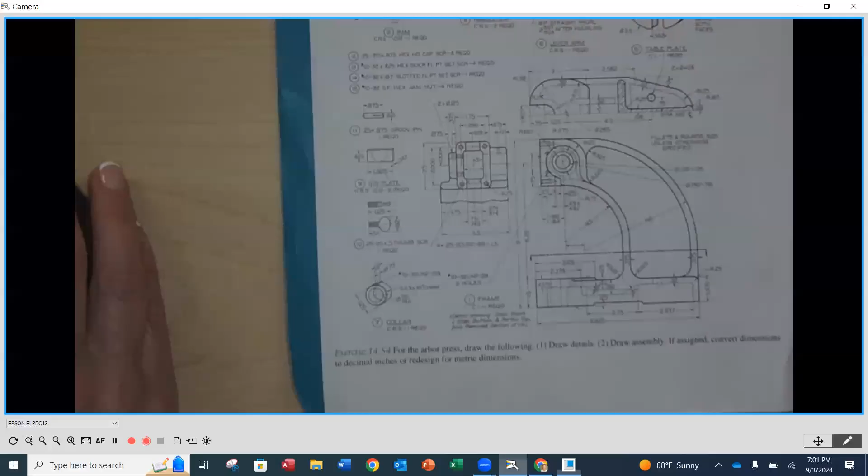Okay. And for this, we're going to just use the default template because this is just for a part. This isn't for a drawing. So we're going to say okay, oops, of course it is. I need to do an _1 because I already created mine. Don't do the _1 for yours, just do 330. And now we're going to be at our familiar spot. So let's take a look underneath our camera at this pinion shaft.

So we are going to be creating the tooth profile of the shaft, and you can't really see a whole lot of detail here. So something you're going to notice is that this is called out as a 20-degree stub 12-pitch gear. And down here, it's going to mate with a ram that is also a 20-degree 12-pitch stub gear rack. Okay, so this is a rack and this is our pinion.

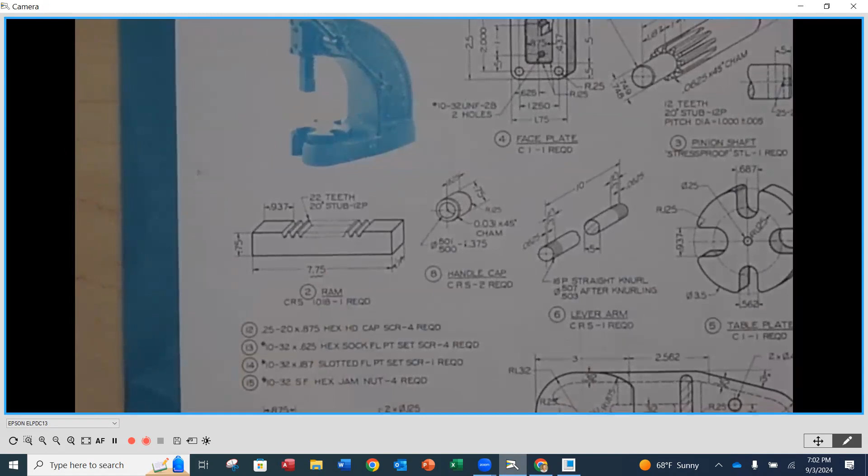Now, as I was doing some investigation, stub gears are quite old school stuff. Okay. And when I was looking at these, they actually don't have a curvature to them. So stub gears typically are going to be a very up and down, just a triangle looking gear tooth, where a spur gear tooth is going to actually have some rounded curves to the sides of it.

Now, in doing some investigation, I was having a hard time finding the equation for the teeth for a stub gear, but in finding out, and I checked this in a couple different places, standard spur gear teeth mesh with stub gear teeth on a rack. So what we're going to do is we're going to actually use what we call the involute tooth profile for a standard spur gear for the teeth on our pinion shaft.

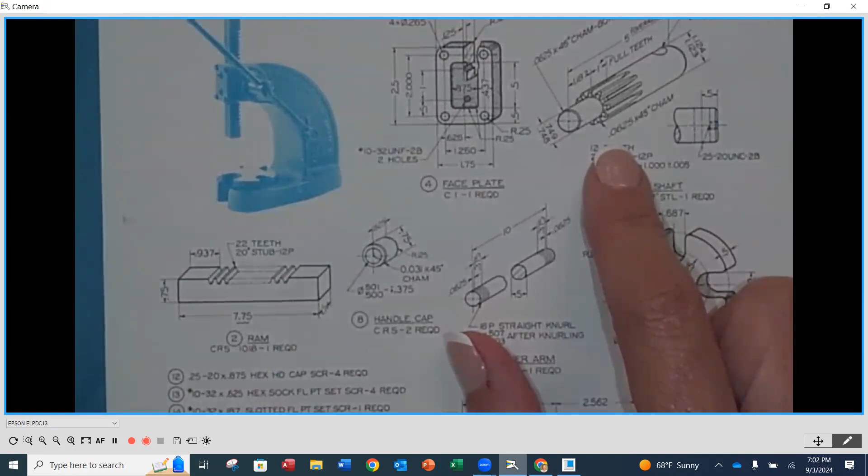But we're going to use, as it's directed here on the rack, the stub teeth. Okay. So these two in combination, even though we're deviating a little bit here on the profile of the gear tooth, they are still going to mesh properly. Okay. So we don't have to worry about that. So we are going to take the approach of spur gear profile as opposed to the stub tooth profile of these gears.

Now, as we look here, you're going to notice that the gears don't extend the whole length of that shaft. What they do is there's going to be a section here where it goes straight for an inch. That's where it says 1 inch of full teeth. And then they're going to kind of sweep out of the actual shaft itself.

Okay, so that's what we're going to be creating in Creo. We are going to actually be creating the cuts out. We're not going to create the individual teeth. We're going to create the portions that we're going to cut away so that the teeth are left over after that operation, or after we create those teeth.

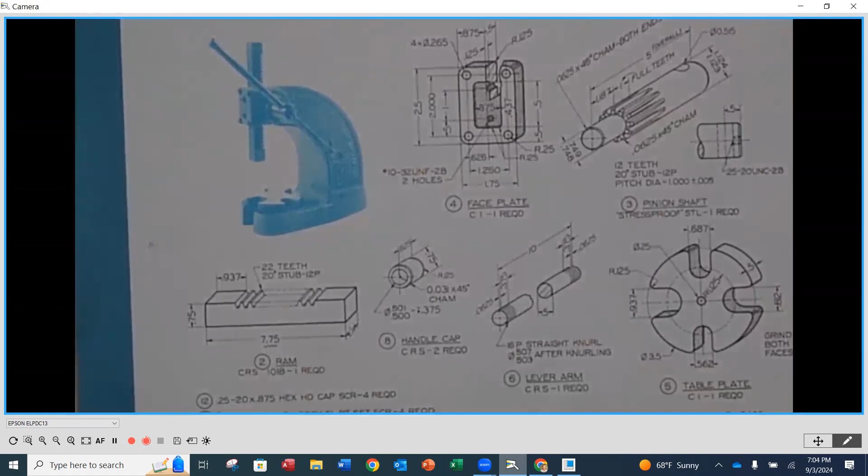Okay, so the process is going to be, we're going to create a sketch of the profile of the cut, and then we're going to do the trajectory of the path that that cut is going to take. This is a sweep. Okay, a simple sweep is going to be one single sketch cross section that we're going to run along a path.

An extrude function is actually a sweep. Okay, except it's in a straight line function. The trajectory is on a straight line. So we don't call it a sweep, we just call it an extrude. But it is a form of a sweep.

But in the case of the sweep that we're going to be doing, instead of putting it just along a straight line, because we could extrude that in, but because it's kind of like going up and out of the shaft after that 1 inch, now it becomes a sweep because now we have to push it along that radius that's created. We're not given information about that radius, so we're going to improvise here.

This happens in design. This happens in engineering at times. Sometimes there might be a missing dimension. Sometimes it's kind of like, okay, as the designer, I got to kind of fill in the blanks here. There's going to be a couple places along the way for this arbor press where that is going to occur. That's kind of the fun part of it. You're going to be able to be a decision maker at some points. Okay. So anyway, that's going to be the approach that we take.

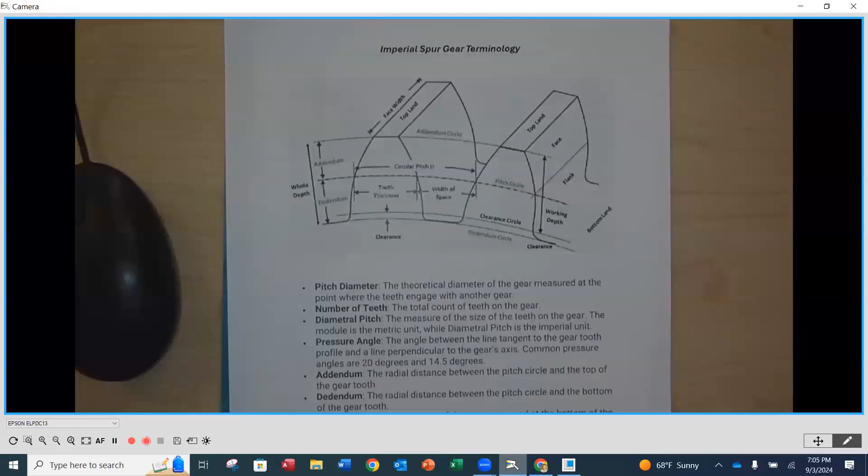Now, what I have gathered for you guys is in the handouts, and there are 2 of them. The first one is that we're going to be referring back and forth to our imperial spur gear terminology. So this is going to equate to the elements that we're going to be creating for the tooth profile in Creo. The other handout that we have is the pinion shaft procedure.

So I'm not going to say it's a perfect step-by-step, but I've kind of hit the highlights that you have to move along. And I'm going to be demonstrating this today in our lecture so that you have the information you need to get this gear teeth cut into that shaft.

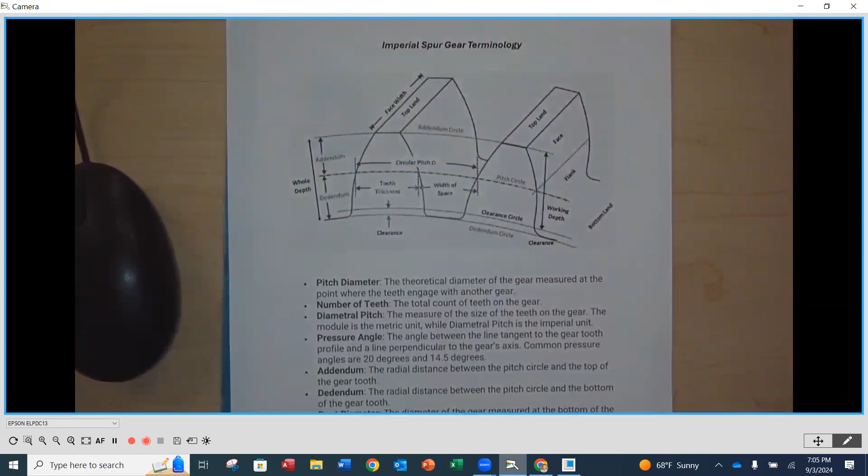Okay. So because we're going to be dealing with the spur gear profile, the profile of the tooth looks like this. So this is where we have this curvature on the sides of the tooth. We have our pitch diameter going through, not exactly the middle of the tooth. We've got what we call the addendum, which is the top portion there, and we have the dedendum. The dedendum is always going to be deeper than the addendum of the tooth.

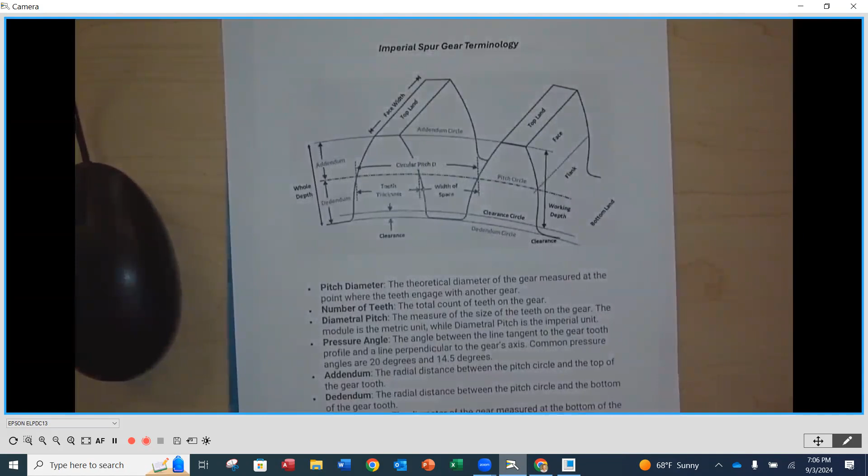And the reason for that is because this pitch diameter is where it meshes with the other tooth, or in our case, the rack. And that's what we call the effective diameter. This addendum of the mating tooth is going to be down in the dedendum of this tooth. So the dedendum always has to be deeper than the addendum. Otherwise, you would have gears that are going to be colliding.

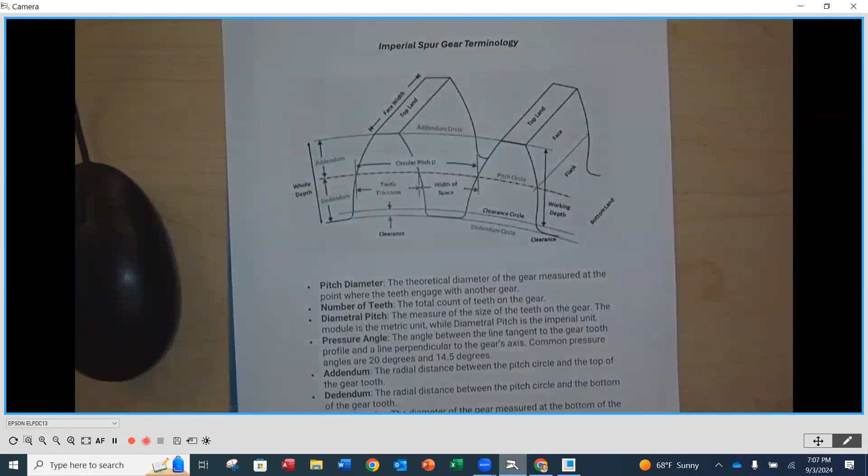All right. So addendum is the height of the tooth above the pitch circle, and the dedendum is going to be down below. Then we have what we call the circular pitch. The circular pitch is a distance along that pitch diameter where if we take one point, and it can be any point on the tooth, to the very same point on the next tooth, that's the distance between. That sets what we call the pitch of the tooth.

When we look at gear teeth, some of the terminology is down here. So we've talked about pitch diameter, which is this diameter right here going all the way around. Number of teeth is physically the number of teeth around a gear. Now, diametral pitch, these two sound similar, but they're different. Diametral pitch is what I like to say is the size of the tooth. It's a ratio of the number of teeth in that gear to the pitch diameter of that gear.

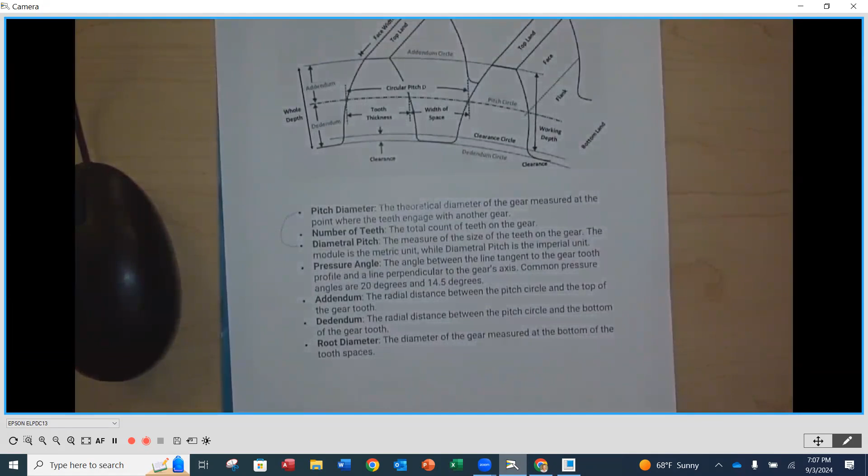All right. So the larger the number, the smaller the tooth. The smaller the number, the bigger, the chunkier the tooth. So diametral pitch is going to be how big or small the profile of this gear tooth is. The pitch diameter is the actual diameter going all the way around where it would have physical engagement with the mating gear teeth.

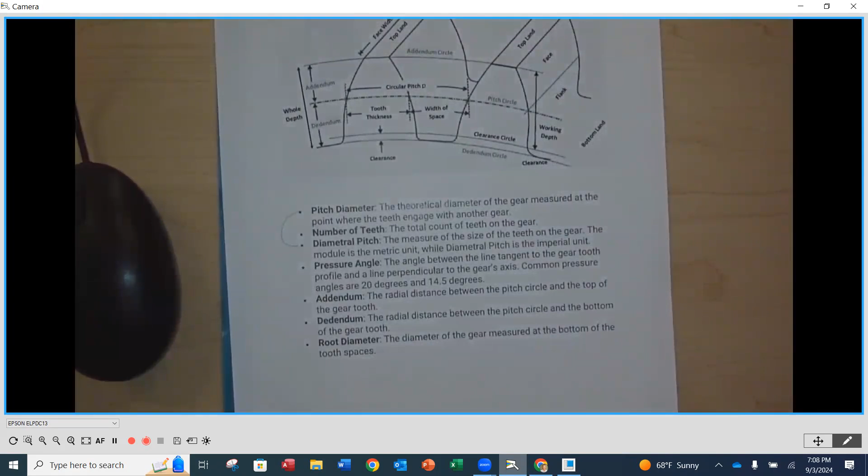Pressure angle. Pressure angle is the angle at which we get contact from one tooth to another. Know that there's 3 main pressure angles. There's 20 degree, which is the most popular, 14.5, and there's 25.

14.5 no longer are made for new gears. We don't make any new designs with 14.5. We'll talk about that in machine elements and why that is, because there's some mechanics to it. So those are only for replacement parts, but they're out there. New designs will only be 20 and 25-degree pressure angles. Okay, just so that you know. So that's why we're using a 20-degree pressure angle, which is very common.

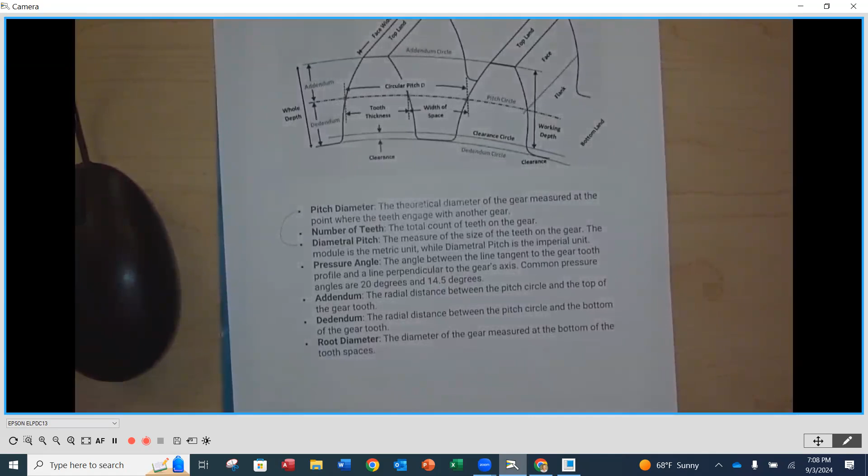Addendum, we said, is going to be the distance above the pitch diameter to the top of the tooth. Dedendum is going to be down. And then we have the root diameter. The root diameter is going to be a diameter that is measured around the very bottom, which is called the root of that tooth. So that's going to be the root diameter.

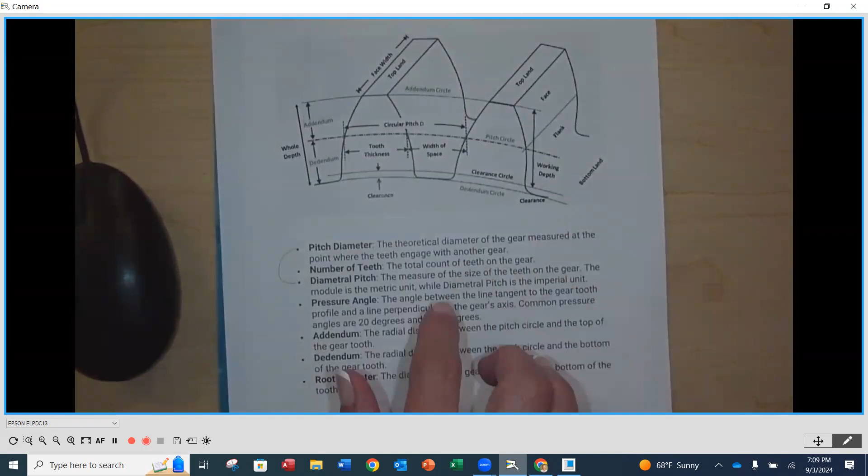Additionally, some other terms that are on here that we don't mention down below, that we're not going to be using in our case, would be, for instance, face width. If we had a traditional gear in front of us, it would be a certain thickness, and that is what we call the face width of the tooth. Looking, I think everything else we kind of looked at. Tooth thickness, we won't be worrying about for ours.

Oh, working depth, that is going to be the distance from the top of the tooth to what we call the clearance circle, and that's before the bottom of the dedendum. So kind of looking at that terminology, if you need to go back to this, it kind of gives you an overview of what that is.

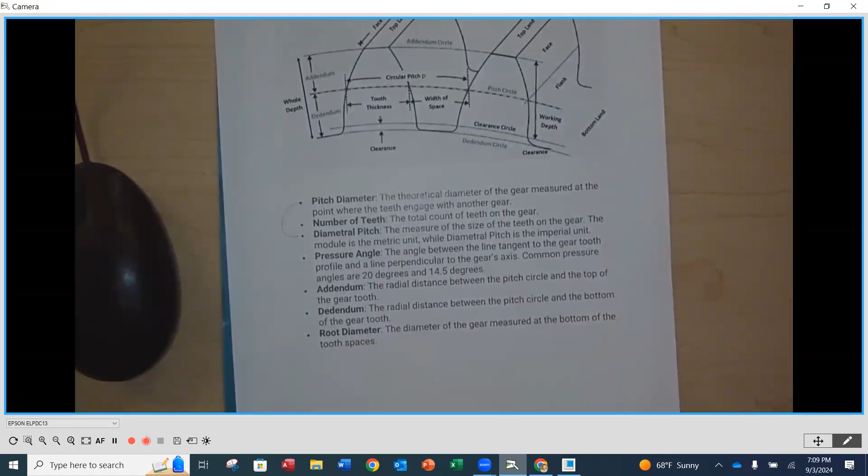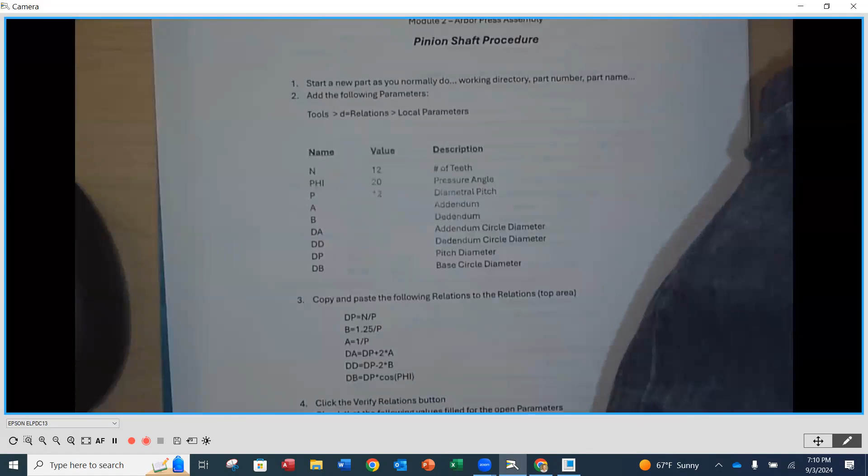Okay. So let's look at then, secondly, our procedure. So we're going to be kind of going between these two. And the procedure that I have here is how we're going to be creating this sketch and getting everything in place so that we get the right profile. So the first thing we're going to do, you're going to notice we're going to start a new part just as you normally would do. We're going to identify the working directory, part number, part name, and such. And we already did that.

Okay. Then what we're going to go through is we're going to add in parameters. We're not even going to worry about laying down any circles or things yet. We're going to start with creating these parameters and identifying our relations. Okay. So to do that, we're going to go into the tools menu. We're going to go to D equals relations, and then we're going to go to local parameters. So I'll show you what that looks like. So I'm going to go to Creo.

Here is just where we get when we normally start a part. We're not going to go into any menus to create anything at this point. We're going to go up to the tools tab, and we're going to go over to the D equals relations. And we're going to click on that. Okay. What we're going to be doing is setting up our equations and our relations so that we can create these gear teeth. Now, at the top here, these are relations. These are going to be the equations that we write. But before we can write the equations, we need to identify our parameters or variables. So we're going to expand the local parameters down here.

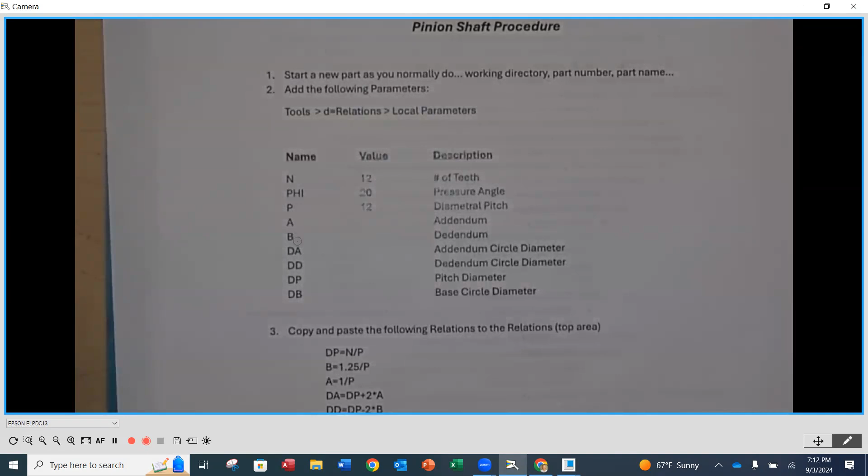Okay. Now, at the bottom, there's some canned ones that are in here. All right. And I think we can just hit the plus key down at the bottom. Okay. And what we're going to do is we're going to put in the items that we see below. So I'm going to go back over here. Now I just remembered I'm going to have to adjust something, but we are now going to put in the items that we see here. So we're going to do N. For the name, it's just going to be the name of our variable. The value is going to be 12. And in the description column, we're going to put number of teeth.

So I'm going to go back to Creo over here. Again, after hitting the plus sign, this is going to highlight. I'm going to put N. And then you can leave real number in the middle. The value is going to be 12. And then we're going to go over a couple columns to description. And that is going to be number of teeth. Oopsie. Okay. And then you can hit enter and then hit plus to do our next one.

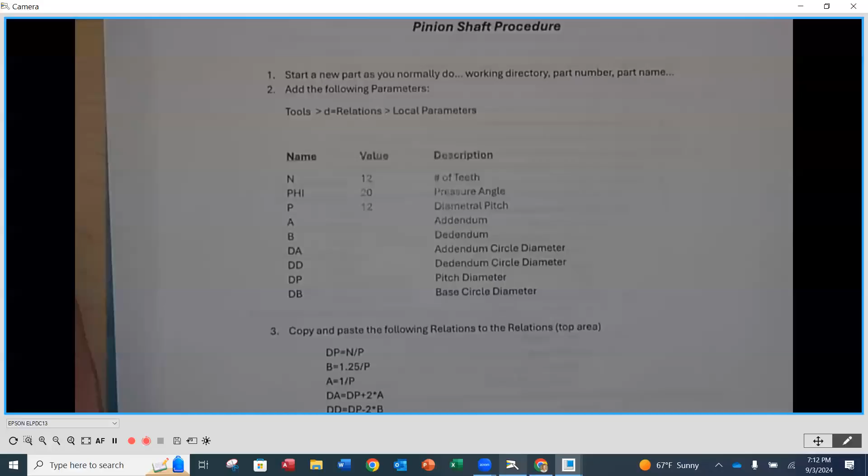So I'm going to go back underneath here. You're going to do phi, which is the pressure angle. That's going to be 20. And the description is pressure angle. And we're going to continue to do this all the way down. Okay. For the ones that don't have values, for anything in the middle here, you don't have to put anything in. Just leave it blank and then just go straight over to the description. So I'll give you a chance to fill those in.

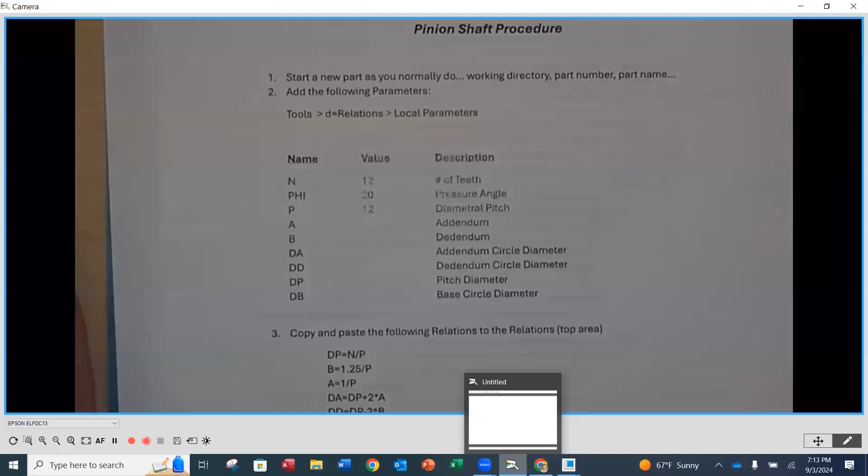No, you don't need to add units. Good question. What was that? The part file, correct. These will save to the part file.

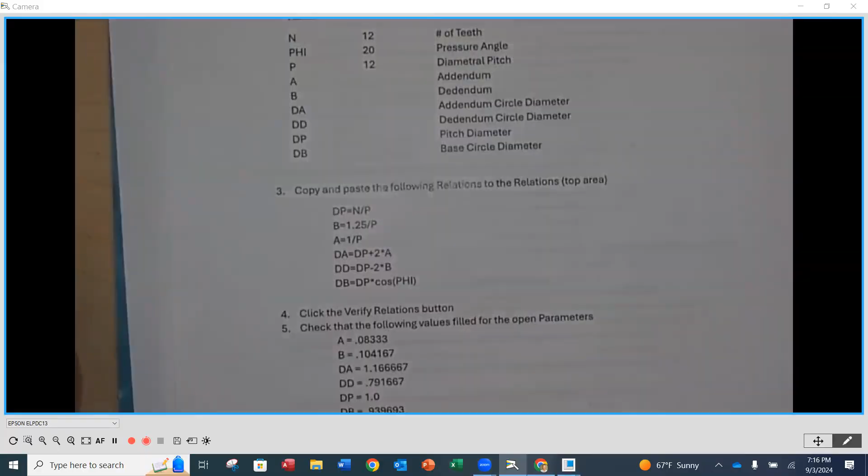So now we're going to notice that we're ready for step 3. So we're going to be copying and pasting this portion up into the relations at the top of that dialog box. So I'm going to go back to my Canvas Module 2 learning plan. And what I want you to do is the Module 2 pinion shaft parameters and procedure, you're going to want to download that Word document, okay?

By downloading that and opening it, it's the same procedure that we have here. You want to enable editing. And now what we can do is we can copy this, okay? So I'm going to do right click and just hit copy. And then I can go back to Creo. So this is step 3, go back to Creo.

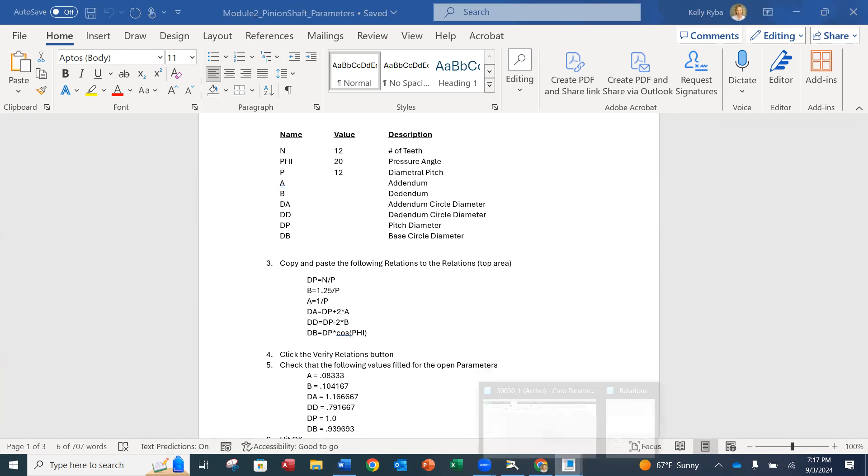Okay. And now up in the top where the relations are in this dialog box right here, I can do Control V. And it looks like I just have to backspace here to get these all in line on the left-hand side. These are the equations that are going to relate our elements back to the pitch diameter, the dedendum, the addendum, the things that we need for sketching that profile. Okay, so we want them all in line here. And that way we don't have to retype them.

So notice that DP, which is the pitch diameter, this is equal to the number of teeth divided by the diametral pitch. Okay, we put in values for our number of teeth, and we put in values for our diametral pitch. And then you're going to notice that for B, our dedendum, the equation is 1.25 divided by the diametral pitch. So it's going to take our diametral pitch number then, and it's going to use it in these equations.

Now, we need to verify these equations first. So you need to click on the verify relations key or a little button over here on the right-hand side. And you should get relations have been successfully verified. Okay. As long as they're all over on the left-hand side there, delete those spaces if you need to. Now, once we have that, what that says is it understood all of these values here.

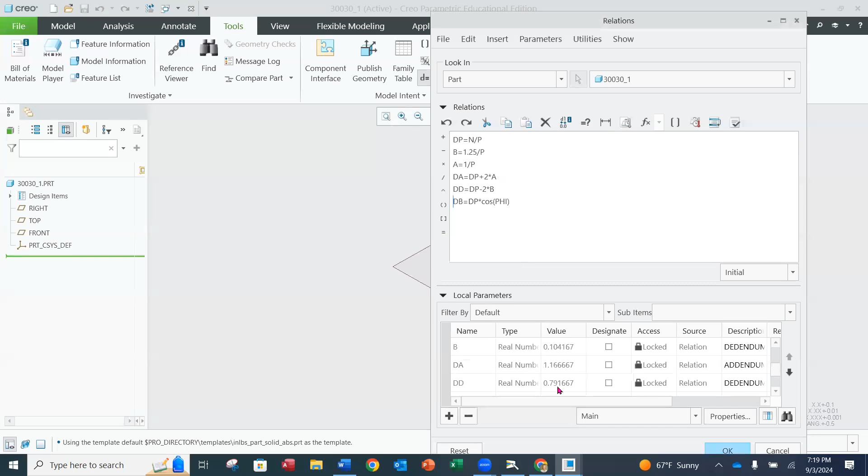And now when we go down to the local parameters that we left open for a value, they now have values in them, okay? So you'll notice that DA has 1.1667. DD, which is the dedendum diameter, is 0.7916. Now, on that handout, you're going to notice that you're going to verify those relations, and now these items should all match these values. I'm not going to go through and read all of them to you, but you're going to want these to match. If they don't, then something wasn't typed correctly in one place or the other, okay?

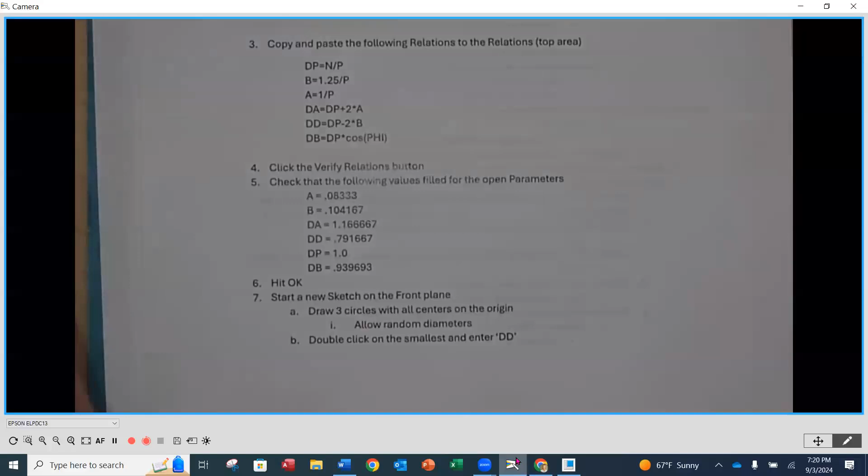Now, once those match and you're good, you can simply hit OK at the bottom of that dialog box, okay? So now if we look underneath, we hit OK, we're ready to start a new sketch on the front plane, all right? And we're gonna draw 3 circles that all have their centers at the origin, and we're just gonna draw them as random diameters.

So I'm gonna go back to Creo here. I'm gonna start a sketch. We're not gonna do the extrude, so we go back to the model tab. We're gonna go to sketch. We're gonna sketch on the front plane, and we're gonna hit sketch. And now we're gonna create 3 circles, regular circles. Center is gonna be at the origin.

Here's our first one, our second one, and our third one. All are concentric at random distances, and you're gonna hit your middle mouse button to get those in place. Now I'm just gonna kind of offset my diameters here so that I can see which ones are which. And then this one I'll kind of put up here. Okay.

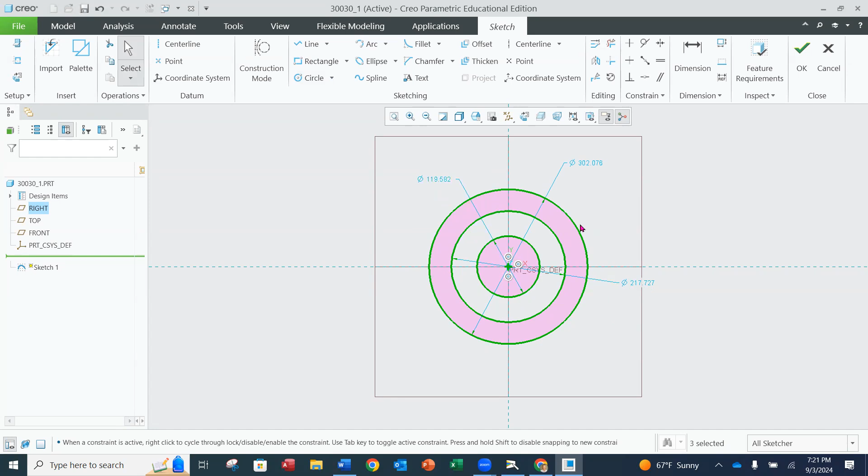All right. So now we've got a small one, we have a middle one, and we have an outer circle. What we're gonna do is assign those variables that we just did to each one of those, okay? The first one is gonna be the smallest circle, and that is gonna be the DD. That's gonna be the dedendum diameter. It's the smallest dedendum, or the base circle, as it's sometimes called.

So I'm gonna go to my smallest one, double click on it, and key in DD, okay? I think it has to be in capital. It may not have to be. DD. Once you hit enter here, it says, do you want to add this relation? That means that this dimension SD1 is going to be equal to your dedendum value. And you want to say yes.

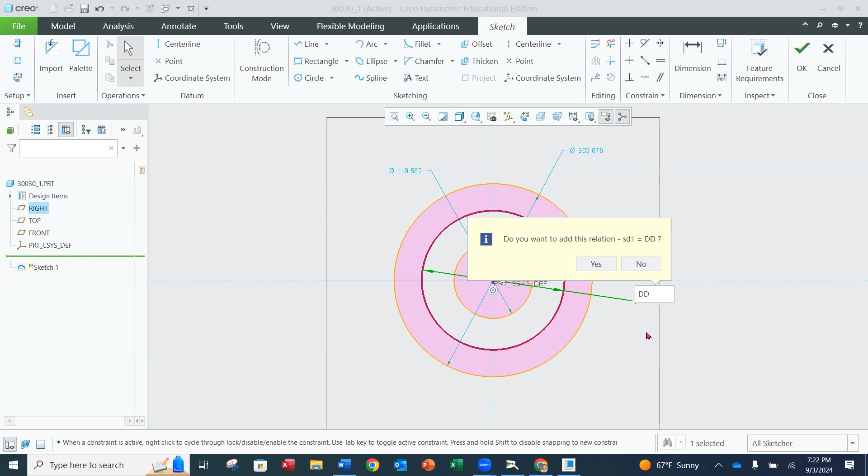Okay. So now it automatically updated that value. If we go back and look at the relations, or if you look just directly above, DD was 0.791667. And sure enough, now that's the diameter here. It assigned that from those relations we created earlier. Okay. Now we're going to go to the middle one. We're going to double click on it.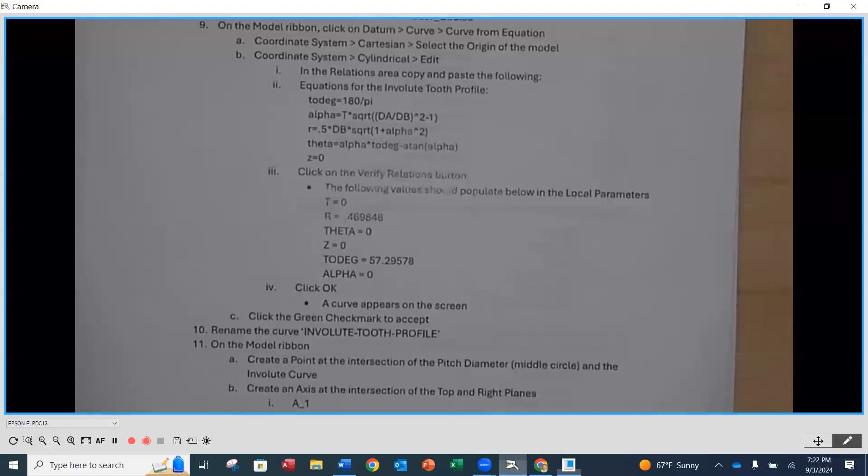And if you turn to the next page, in that same step, this one is going to be DP. This is going to be the pitch diameter. This is what we call the effective diameter, where it meshes with the other teeth. So DP, enter. And yes, we want that to be added as a relation. And you're going to notice that this went to 1 inch. If we look back on the previous page, our DP is 1 inch.

Okay? And then the last one, the outside one, we want to assign a DA for that one. And that's this one. So DA, enter, yes. And now that's at 1.167, which is the value that we should be seeing there as well. Okay. So now we are ready for step 8.

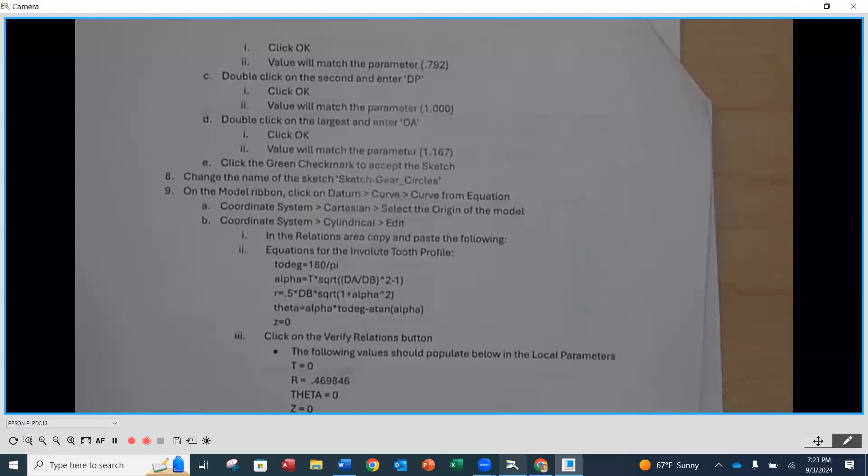Step 8. So what we just added are 3 diameters. The first diameter, the smallest one, was this diameter on the inside at the bottom of the root of that tooth. The second diameter is the pitch diameter that we see right there. And the third diameter was this outside diameter at the top of the tooth. Those were the 3 reference circles that we have. All right. So now we're ready for step 8.

We want to hit OK to accept the sketch we just created, and then change its name to sketch gear circles. So if we go back to Creo, double check your feature requirements, make sure that you have your 2 green check marks, and hit OK to accept this sketch. Now we're going to rename this sketch as sketch gear circles. Okay.

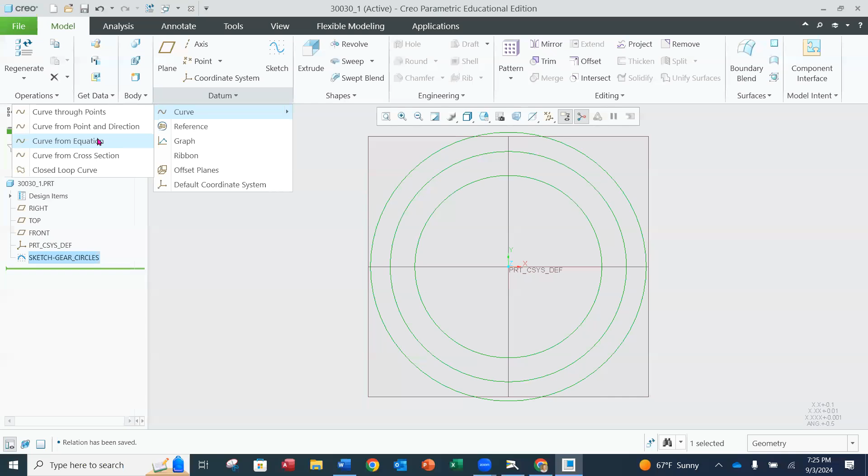Now step number 9 says on the model ribbon, we're going to click on, and this is just a sequence of things we have to do to set up the next portion to create our curve. So we're going to go to the model ribbon, down to datum, down arrow. And we're going to go to curve, but don't press it yet. Just hover over curve and you get this flyout menu, curve from equation. We're going to click on that.

And then you get a new ribbon here. Make sure that the coordinate system is set at Cartesian, which it should be. We're going to rotate our view here, because now they want us to choose the coordinate system origin. So we're going to click that origin in the middle of the screen. And you're going to see that it populates up here in the coordinate system. That's all you have to do there. Then we're going to change this Cartesian to cylindrical. And then we're going to click on edit.

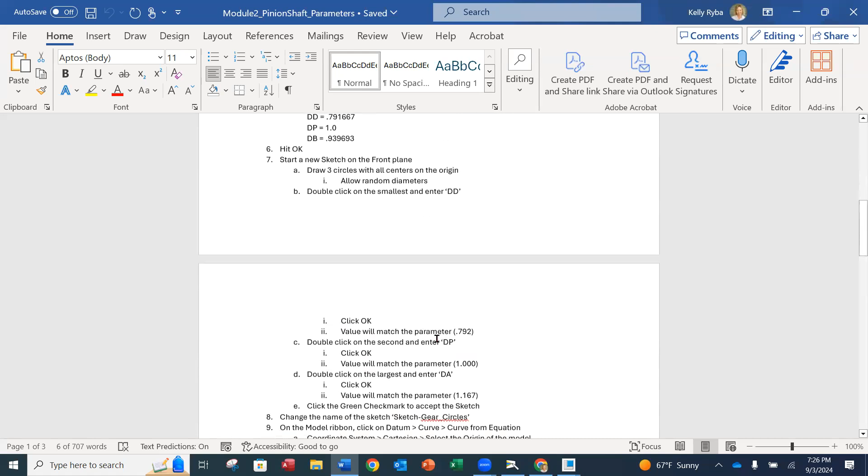Now we're going to get a similar dialog box, but it's not the same as what we did before. Notice that the values down here are T, R, theta, and Z. This is where we are going to take the equation of the line for the profile of that spur gear and add the equations up here. So we're going to go back to our Word document that we downloaded earlier, to the second page. And right here, the equations for the involute tooth profile are what we want to copy.

So right click copy, or Control C. And we're going to go back to Creo. And in the relations of this dialog box for the equation of our curve, we're just going to hit Control V or right click and hit paste. Okay. We want to verify.

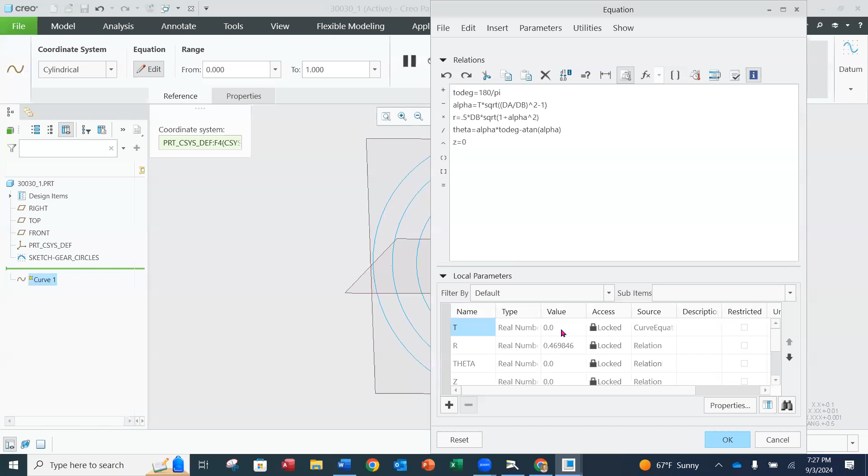So we click that little thing there. Relations are verified successfully. We're going to hit OK. All right. And we just want to kind of see here that a couple things populated. So we're going to notice that T remains 0, which is okay. R is going to be 0.469846. And then TO degrees is going to be 57.29. The other ones are zeros. Okay, so that's totally fine.

And now what we're going to do is we're going to click OK. What you are going to notice is that a curve was created here. So if you tipped your view, just go back to view the front plane, and you are going to see that curve appear. That is one side of our involute tooth cut that we are going to use to create the rest of it. Okay. All right.

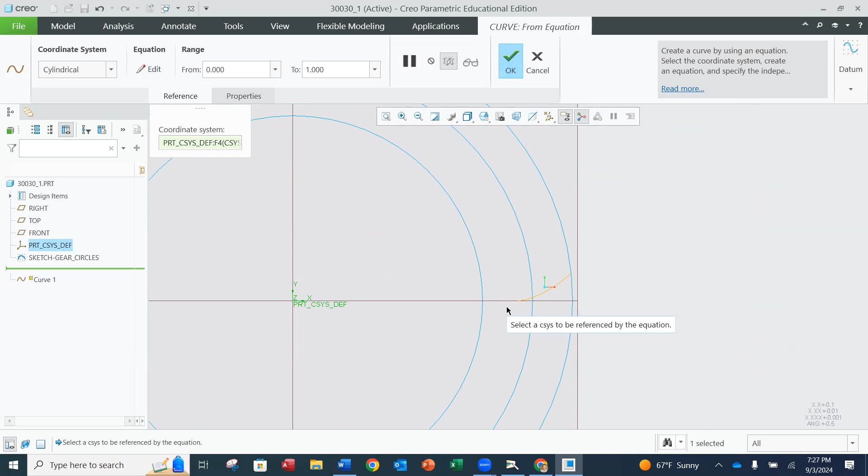All right. We're going to click the green check mark, and now we go out of that. So that created our profile for us. Now you'll notice that a curve was created in our design tree. We want to rename that. And we're going to rename that to involute tooth profile.

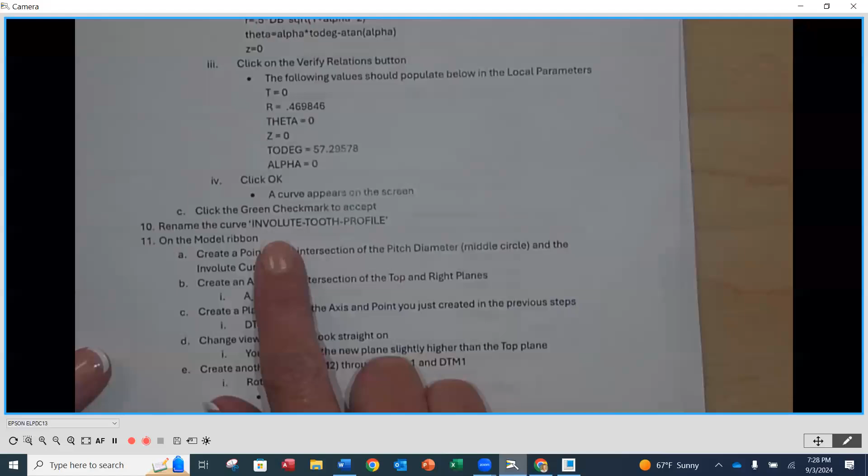All right. So if we look back at our procedure, I just want to catch us up to where we were at. We renamed it. This was step number 10. Now we're going to be starting step 11. This is going to be the part where we're going to create the sketch for the actual cut that we're going to do. So go back over here.

So we've got our 3 circles. Again, this is the base circle or the dedendum circle. This is the pitch diameter. And this is the outside of our tooth, like the very top of the tooth. And then right here, this is the start of that profile. Now, the first thing we're going to do is we are going to create an axis.

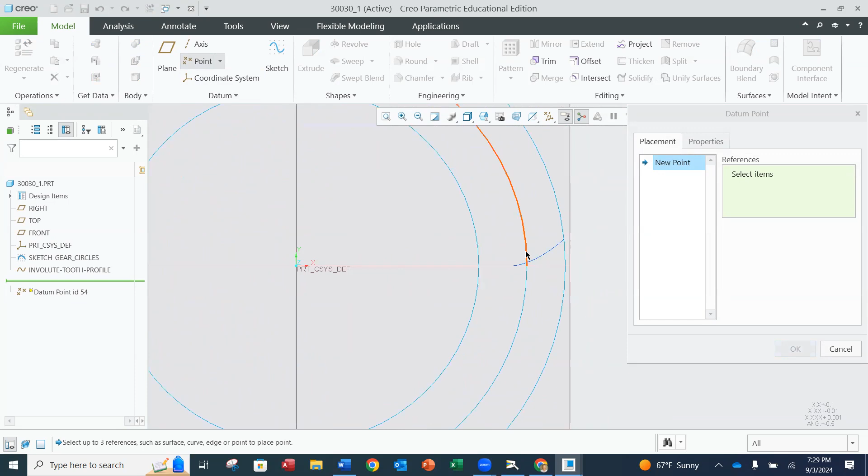Oh no, we're going to create the point first at the intersection of our involute tooth profile and the pitch diameter. So on our model ribbon, we're going to go point. And we're going to create a new point. I'm going to do shift and move over so we can see this at the same time. And I am going to select the pitch diameter, the middle one. And then I'm going to hold my control key and I'm going to select my curve.

And I just created then a point at the intersection of those 2 items. You have to be holding the control key as you select both of them, okay, so that you get both of them. So I've got a point right there. I'm going to say, okay.

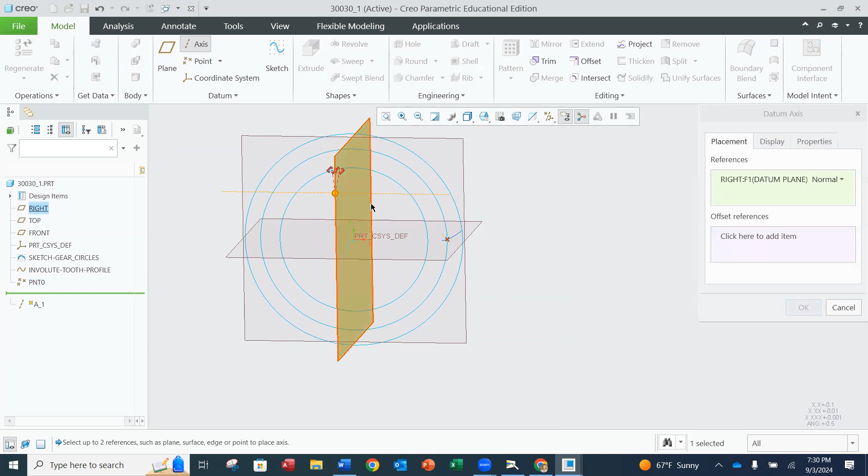Now, the next thing I'm going to do is I'm going to create an axis at the intersection of my right and top planes. So still on the ribbon here for the model, I'm going to create an axis, okay? And it's going to be at the intersection of my right plane. And then I'm going to click on Control and my top plane. And you should see, now it's very faint here, an axis that just created down the middle here.

And if I go like this, it's like an axis that's coming through the origin at the intersection of the right and the top planes. And I'm going to hit OK. And now we can see it a little bit more clearly, right? So I just created a point and an axis that's in my tree over here. I'm not going to worry about renaming those. So A1 is my axis that I just created.

Now I'm going to create a plane through the axis and the point. So still on my ribbon, I'm going to create a plane here. Okay. I'm going to start that over for a second. You want to have this axis highlighted. I don't know if you did that or not. I still have mine highlighted. I'm going to hit the plane because I want it to go through that axis and then through the point that I also created. So now I'm going to hit Control and I'm going to click on that point.

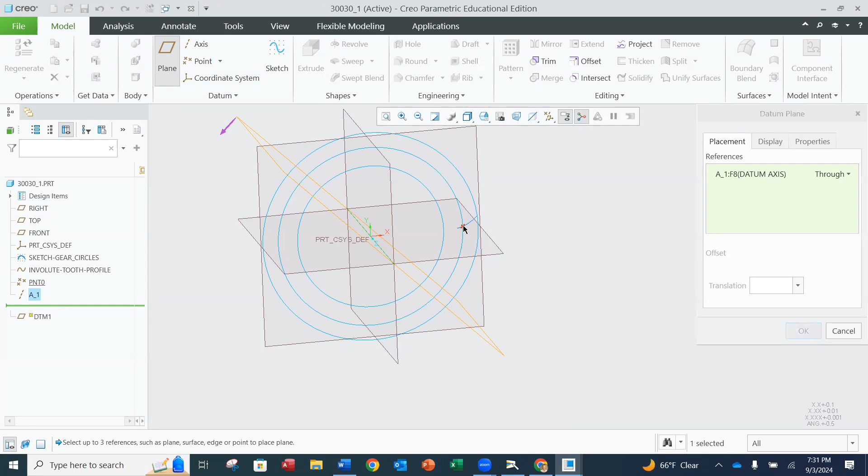And now what you'll notice is there is now a plane that is rotating at its center on that axis that we created first and now out to that point. So these two are here. So now I can hit OK. And if I look straight on my front view, you are going to see, if you zoom in, the horizontal line is that top plane, and then this is slightly tipped up through the center of that point. Okay.

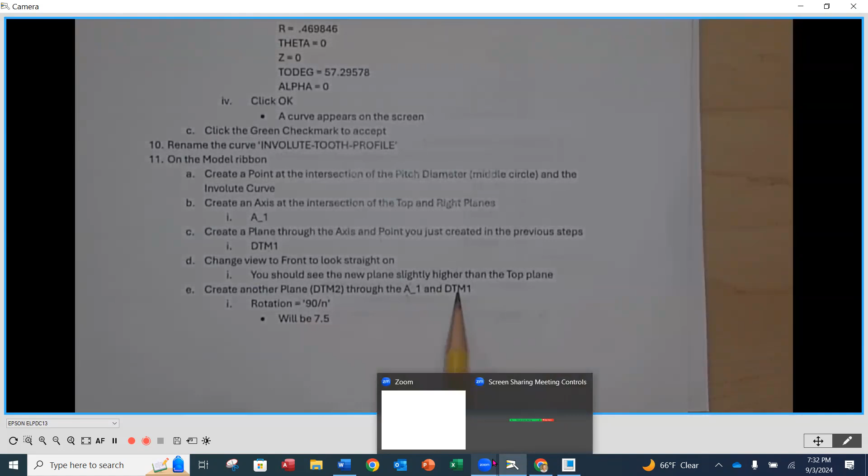All right. So where we are at: we just created a plane through that axis and that point. View it from the front view. You should see that it is slightly higher than the top plane, which we saw. Now we're going to create another plane, which is going to be datum 2, through A1 and datum 1. Okay. And then we're going to rotate it 90 over N. So we'll see what that is in just a little bit.

So I'm going to zoom out here a little bit. I'm going to create another plane. Okay. It's going to be datum 2. And I want it to go through that datum plane and through A1, which is my axis. So I'm going to do Control. Oopsie. I think I can grab it right from here. So you can also go on here in case you don't want to rotate it. So Control there. And I'm going to hit OK.

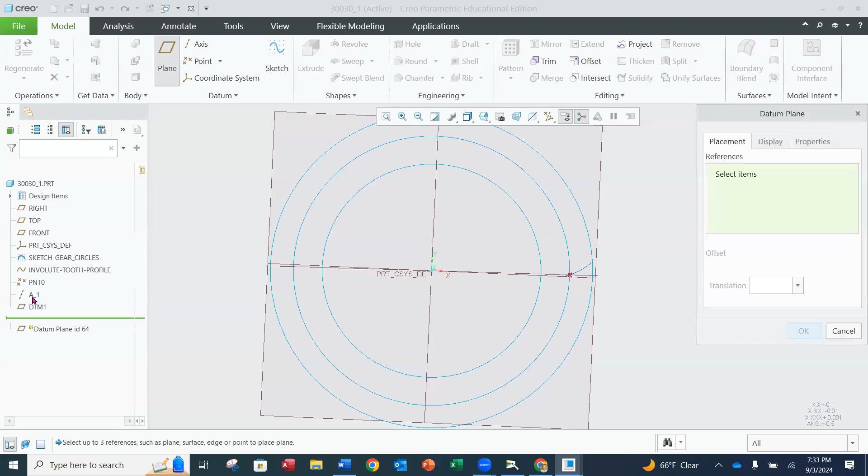Shoot. Undo that for a second. Let's do that one more time. I'm sorry, I hit OK before I put my value in. Plane. And I want to go through the axis and the point. So hit Control and click the point. No, I'm sorry. Do I really want to cancel? Yes. One more time. Let's read the instructions, Kelly. There's so many steps in this.

So I'm going to create a plane. Okay, create a plane. And I'm going to go through my axis and datum 1, not the axis and the point. I already did that one. So plane through the axis and Control through datum 1. All right. And now what you're seeing here is it wants to know from that plane, how much do you want to rotate? Right now it's set at 45 degrees. Okay. And it's rotating upwards.

What you want to do is rotate this down. I'm going to left click and just pull this down underneath here. Okay. So that's going to be my position because I want it down away from. And then we're going to put in 90 in this rotation, 90 divided by N. What that is, is 90 divided by the number of teeth that we already created as a relation. Our number of teeth was 12. So it's going to be 90 divided by 12. And we're going to hit OK.

And it says, do you want N or 90 divided by N as a feature relation? Yes. Okay. And what happened here is you're going to notice that mine went above. I don't know why, because every other time I've done this, it's gone below. But if yours goes above, that's okay. All we have to do is go back over here. We can hit OK. And we're just going to go back into datum 2 and we're going to edit that.

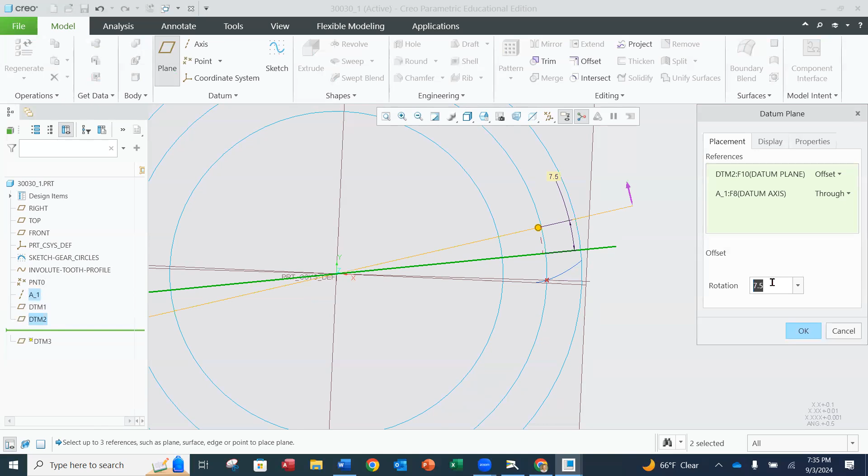We're going to go through datum 2, and then Control, we want to go through the axis. Yeah, through datum 2 plane and the axis A1. I'm second guessing myself now. So I want to do negative 90 over n. There we go. Put the negative in front, and we want it to be negative 90 over n.

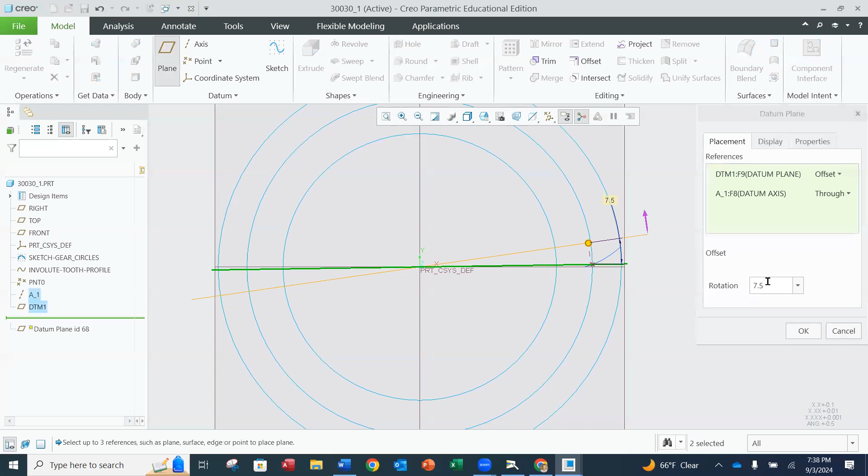I'm just going to stop this for a second. We're going to resume the recording. All right, we're going to do this one more time. I am going to create a plane, and I want to reference my datum 1 and Control axis 1. And then I'm going to do negative 90 divided by n, enter, and there we go. And I think you're right. I think I was clicking on that and doing the negative.

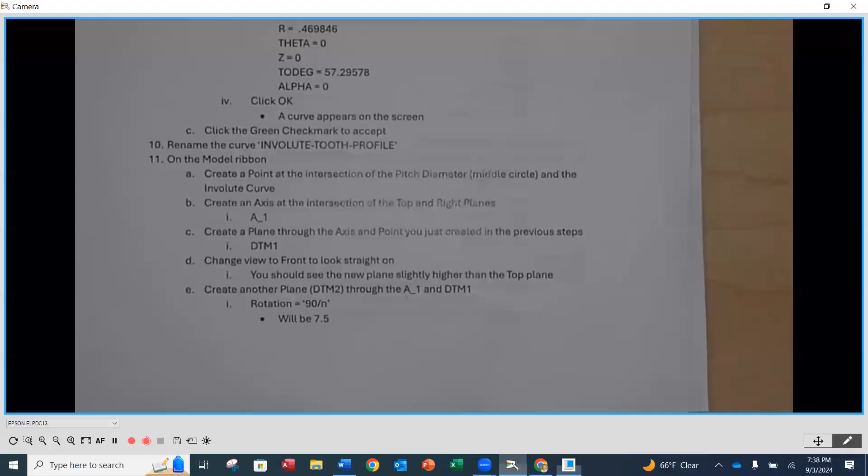So we want this plane to be down in the 4th quadrant, if you would, from the origin. And we want it to be 7.5 based on those relations. So now we can hit OK, and you'll notice that you have a datum 2 that was just created. There we go, finally. So now on our procedure, that brings us to the bottom here where we just created this datum 2. And now we can go to our step number 12. We're going to go back over here because we're in a sketch.

And we're going to mirror our involute tooth over the datum that we just created, so we get it on the other side here. So we're going to select that curve. We're going to mirror it. And we're going to mirror it over the datum 2 that we just created. Okay, so that's the other side of the cut. And now we're going to hit OK.

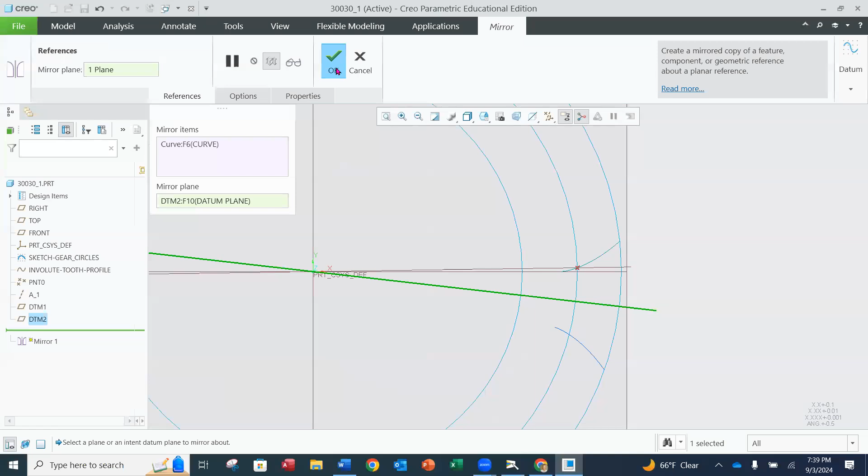So now on our model, we have the 2 sides here. This is a good time to do a quick save so that we don't lose anything that we have. So I'm going to do a file, save, and hit OK.

Oops, I know this said there's 2 on the chat here. Oh, thank you. Yeah, I think I finally got it figured out. Thank you, Matt. All right.

So now that we have this mirrored on this side, what we want to do is create the rest of the cut. And we need to start a new sketch. So we're going to sketch on the front plane. I like to kind of rotate it and select it. I think that's easier. So I should be on my front plane here, and I'm going to hit sketch.

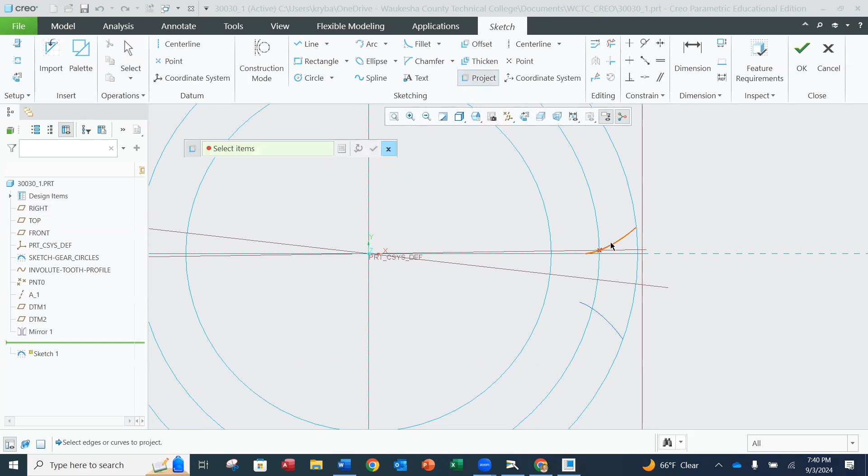And now we're going to project those 2 curves into our current sketch because we started a new one. We're kind of blank slate. We're going to project this curve, hold your control key, and we want to do the other one. Okay. And then we're going to hit the green check mark. And now those are currently in our sketch.

Now we're going to create a line from the origin to the end point of each one of those curves. So I'm going to go first to my top one and make sure that you get the end point of it. Okay. And then I'm going to go back, go there, and go to the end point of this curve. Okay. So I have now kind of this V here. These are the extensions of those lines.

I'm going to create another circle starting at my origin, and it's going to go to the smallest circle. So kind of make it concentric with that or equal to that. And then the other circle, we're going to start at the origin again, and go to the very outside circle. All right. And now we're going to trim away the parts that we don't want. The only part we want is on that inside part. This is going to be our cut.

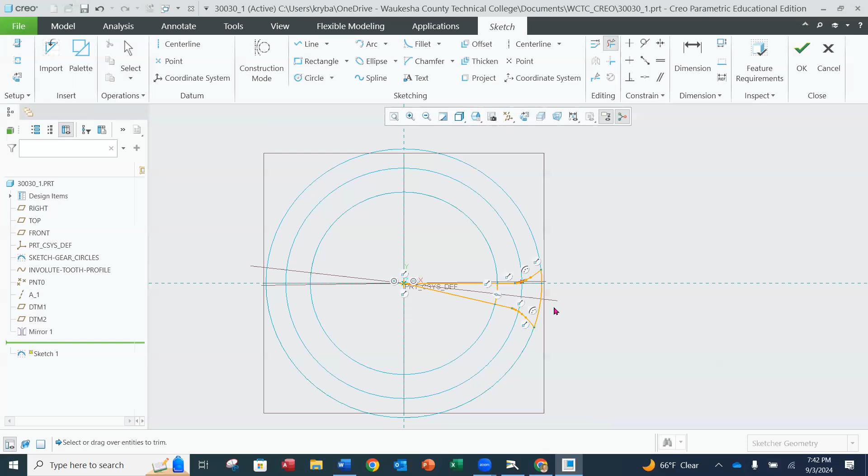So I'll kind of show you. I'm going to do the delete segment. I'm going to get rid of all of the circles on the outside here first. So I'm only left with these inside portions here. And then I'm just going to get rid of these two portions of the line there. And once I do that, you should get a pink interior here, a solid section.

So I got rid of all the areas out here. If you don't have a pink, you might have some lines hanging out over here. All right. This is our cut. So now we can click our feature requirements, make sure they're green, and hit OK. This is the sketch of our sweep. So I'm going to rename this Sketch Tooth Profile Cut. This is what we're going to use for that sweep that we talked about.

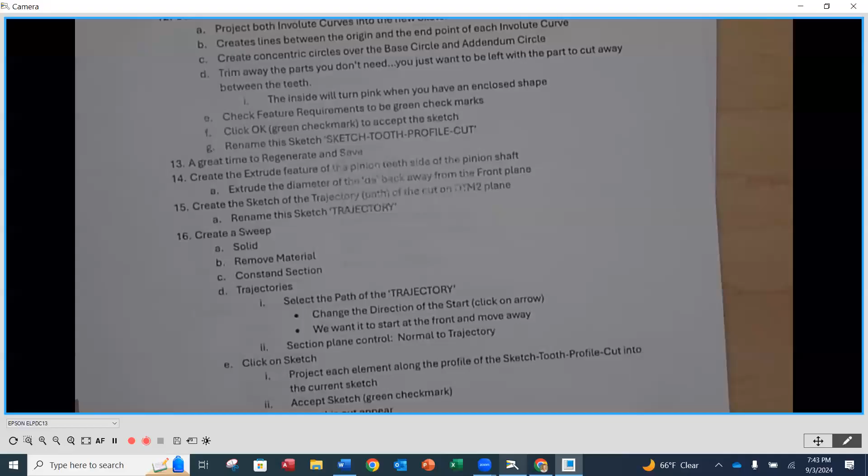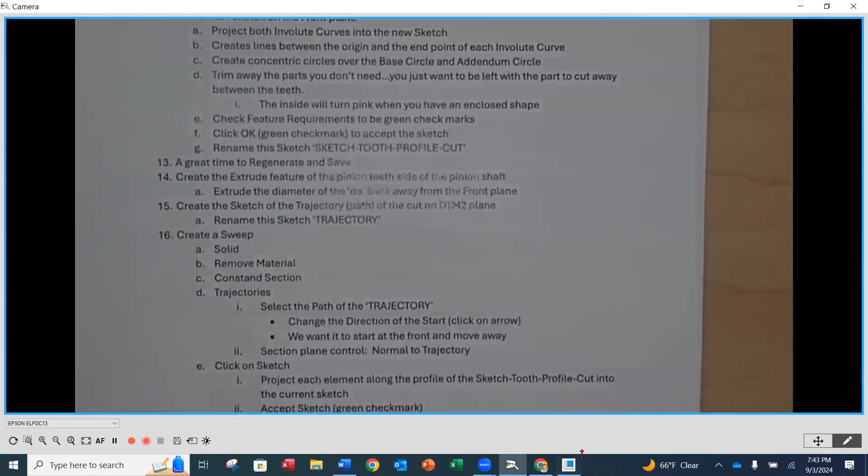I'm going to do a quick save, and go back to our procedure. So we are right here. We created the sketch for that sweep. Great time to regenerate and save as we just did. Now we are going to extrude the feature for the outside diameter. Oh, no, wait. We're going to do the trajectory first. Okay. I don't know if it matters which order we do this in. I don't think it does, but I'll do it in the order that it says there.

So the next thing we want to do is create the diameter going backwards for the rest of the shaft. So I'm going to go underneath here so you understand. If we look at our pinion shaft, looking in the front view here, we have the profile of the tooth. I'm going to create now the diameter going to the back portion.

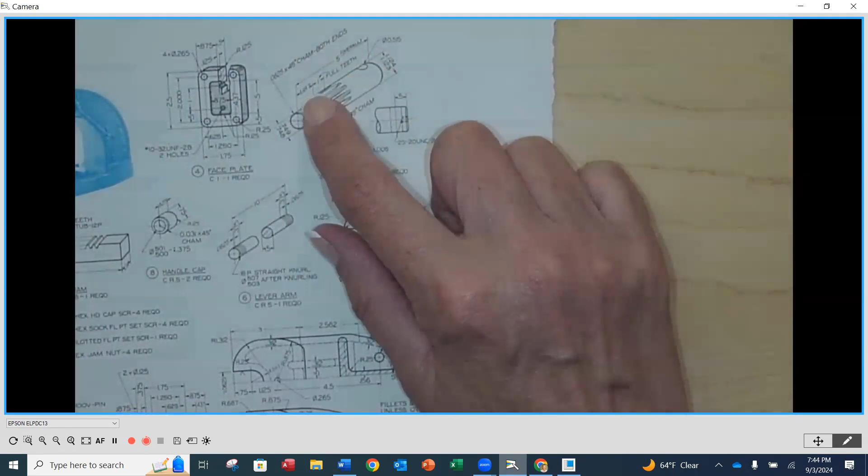So if this is a total of 5 inches long, and the front plane is right at the front face of those teeth, what is the length of this section of that shaft? So it will be 5 minus 1.1875.

5 minus 1.1875, so that'll be 3.8125, is going to be the length of my extrude. So what I'm going to do here is create an extrude. Okay, actually cancel that out. Do not have that sketch selected. So unselect that sketch and we're just going to do a regular extrude, and we are going to do it on the front plane.

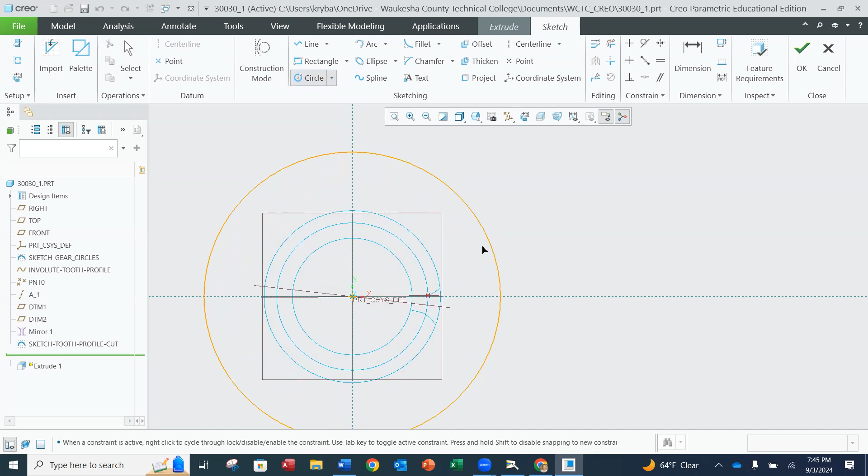What the heck? And I'm in sketch now, so that's good. That's exactly where I wanted to be. It didn't look right. So now I'm going to do a circle and I'm going to make it larger than the outside there. Okay. And I'm going to hit okay.

And then I'm going to double click on that diameter, and you tell me which relation do I want this diameter to be? I want it to be the largest circle on the outside. So do you remember what relation related to that outside circle? It was the addendum diameter, right? The DA was the largest circle on the outside.

So we're going to double click on that and we're going to say DA, enter. And it's going to ask us, do we want this to be that DA relation? Yes, because then it's going to be exactly the size of the outsides of our teeth. That's exactly what we want. So we're going to say okay. And now it made it that.

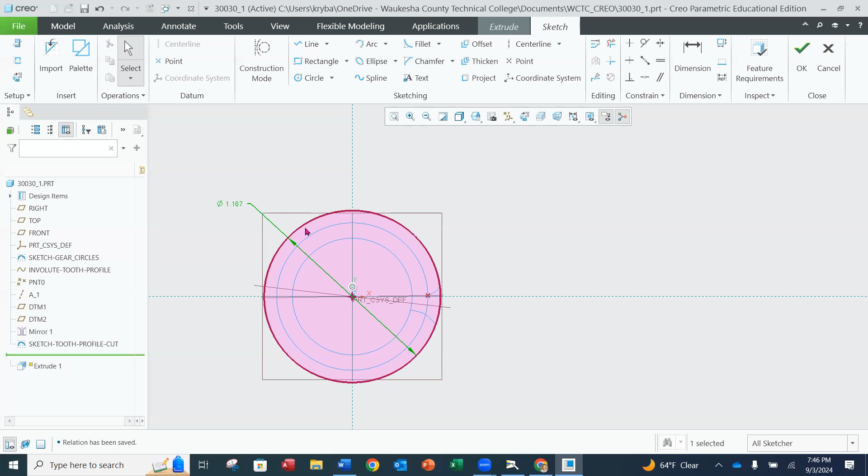Now you might say, couldn't we just attach to the outside of the teeth? We could, but then if anything changes, if we change the number of teeth, the diametral pitch, and we would want to make this a different size, this then continues to tie it to that relation as opposed to a point on the model. Does that make sense to everybody? So now we have this here, okay?

And all we want to do is check our feature requirements. We're going to hit okay. Now here's our front plane. We want this to go back from the front plane. So we're going to change the direction so it goes back, because this front plane is where our sweep is going to start. And we want this dimension to be, what did I say? 3.8125. Okay, it's going to be a blind extrude back. And now we're going to simply hit okay, and we're going to hit okay.

All right. So if we look here on the very front, we still have that sketch of that tooth profile that we're going to be cutting away. Do a quick save. Oh, it said we didn't regenerate. So regenerate and then save is fine. All right. So now we're on the home stretch here.

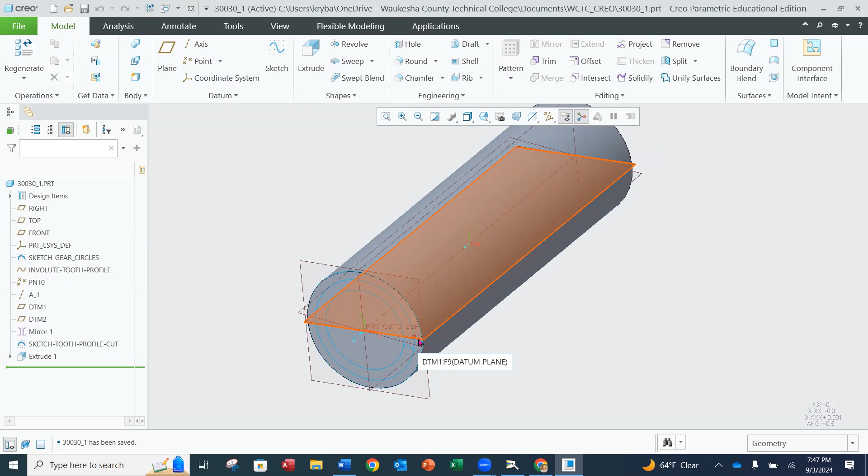We are now going to create the trajectory for this sweep to take. So to do that, you're going to notice that the middle of the tooth is along this datum 1. So we're going to use that as our sketching plane for our trajectory, because we need to look straight down at the middle of that tooth. And since it's at an angle, we can't take the top view or top plane. We have to look down this plane.

So we're going to click on this right here, and we're going to create a sketch. Okay, and this is going to be our trajectory. So now we're looking straight down. It looks like the top. We're not on the top view, but we're looking straight down that datum 1. And what we want to do is create our trajectory to start.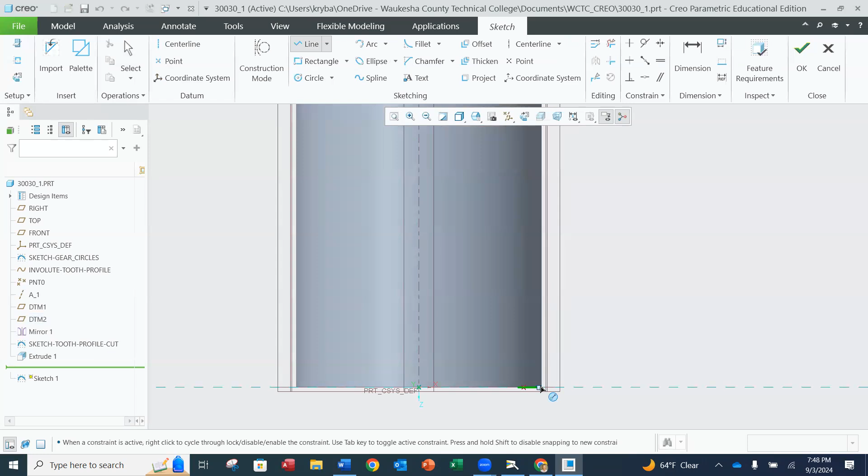It's going to be a line. It's going to start here at the bottom, and it's going to grab that endpoint there of that radius. We're going to start there, and we're just going to go up a distance and then hit the middle mouse button. This distance is going to be the full tooth distance of 1 inch that we have on that drawing. So we're going to dimension.

Actually, it is dimensioned. So we can just double click that length, or you can dimension it, and it's going to be 1 inch. So we just want that to be 1 inch there. Now, if we look back at the drawing, we created the line for the full 1 inch tooth.

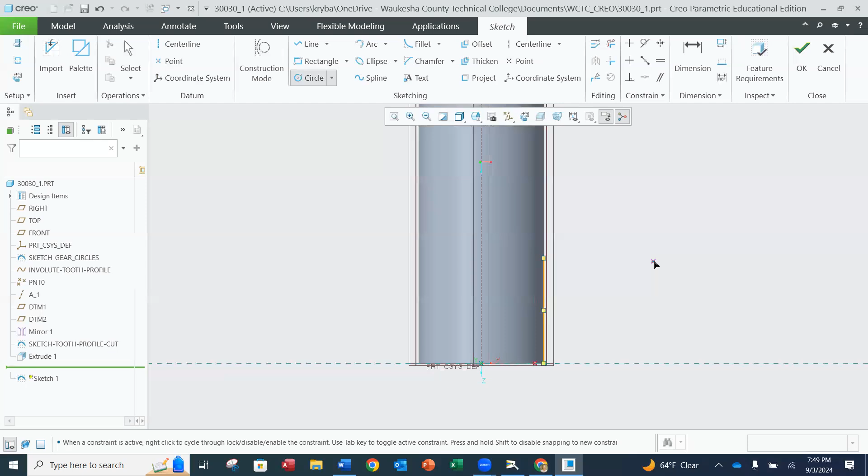Now we need to create this radius, but you'll notice that they don't give us any information about that radius, do they? So this is one of those places that we have to improvise. So I'm going to go back to Creo here, and I am going to create a circle. The circle center is going to be in line with the end of that 1 inch dimension. And I'm just going to go out here a random distance to the right. That's going to be the center of my circle.

And then I'm going to attach to the endpoint of that 1 inch dimension. Okay. And then I'm going to middle mouse button, and I'm going to change this value to a 4 inch diameter. That's it. So this is going to be a radius of 2 coming out. All right. Now, I need to follow that path along that, but not do the whole circle. So we need to kind of cut that off.

So I'm going to put in 2 lines. I'm going to do a line from my endpoint of my 1 inch. Wait, that didn't happen correctly. Hold on. A line from here, my quadrant to the center. And then I'm just going to go right about there. So you're going to create a little V if you would. Correct. This is going to be normal, or at that endpoint of that 1 inch dimension that we created.

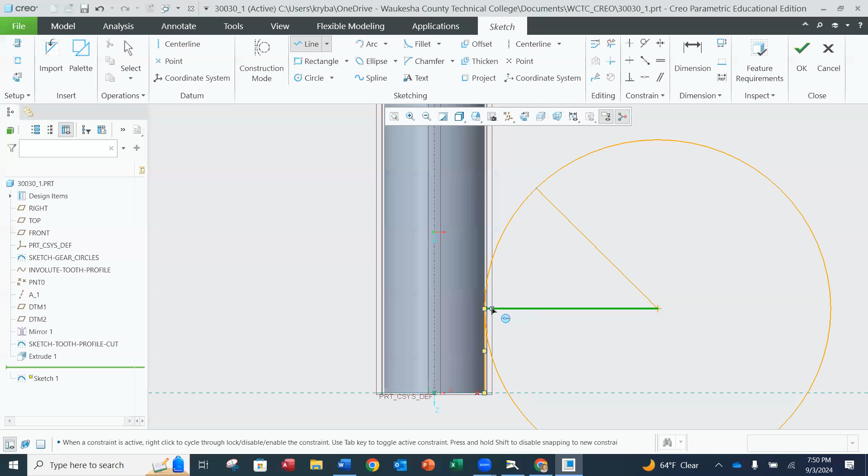My 1 inch dimension is from here to here. Right here. It's on the edge of the part. Yeah. So this line is on the edge of the part going straight up 1 inch. And then my center of my circle is 1 inch from, and then it's a radius of 2. It's right here. So once I have this at 45 degrees, you want to change this angle to 45 degrees.

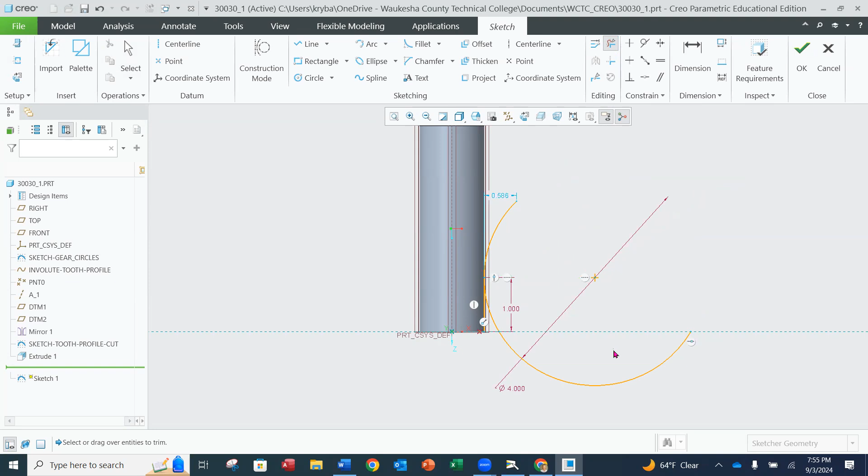I now want to get rid of the segments that I don't want. So I just want to be left with my trajectory. So I'm going to click on delete segment. I'm going to get rid of this part, this part, this part, and don't forget this little part right here. So the only part of the trajectory I want is the 1 inch coming up on the side and then the radius going out for about 45 degrees. That's it.

All right. So once I have that, you can check your feature requirements. I'm good. And I'm going to accept this sketch. Now, if I look at that sketch, all that it is is just this trajectory right here. So we're going to rename this. And this is going to be trajectory. Okay. All right. Now we're ready for our sweep.

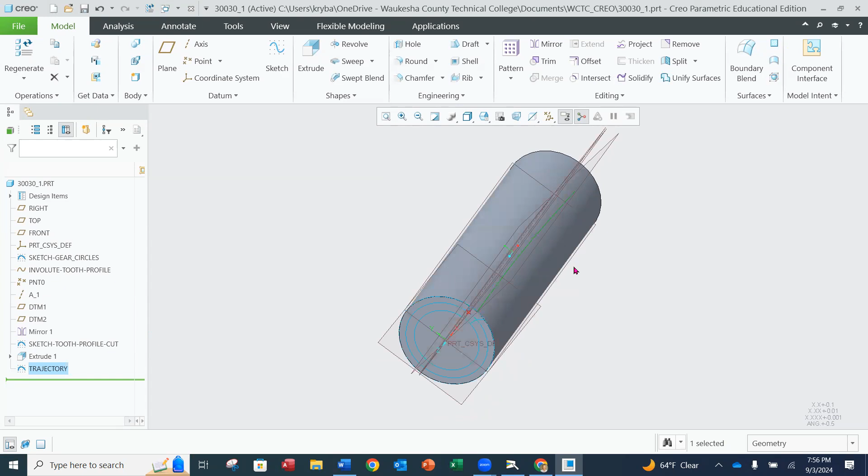So we have our extrusion, we have our outside diameter in here, we have our trajectory, and we have the profile of the tooth that we want to cut away. So we are going to do the sweep command. The sweep command is just to the right of the extrude. And this is just going to be a regular sweep. If we click down on here, there's a couple different types, but we're just going to do the regular one.

Now, the first thing it wants us to do is identify our trajectory. It already selected it for us, okay? If yours isn't selected, just go ahead and select trajectory. I had my trajectory path sketch selected as I went into this command. It doesn't have to be.

Now, the thing that we want to do is this: if we look at the trajectory right now, I have my purple arrow at the end of my line. I actually want to move that to the beginning. So you're just going to left click and you're going to drag it to the front of your line. That's it. And we want it to go right here. And right there, it should start at the... did mine go? I think so.

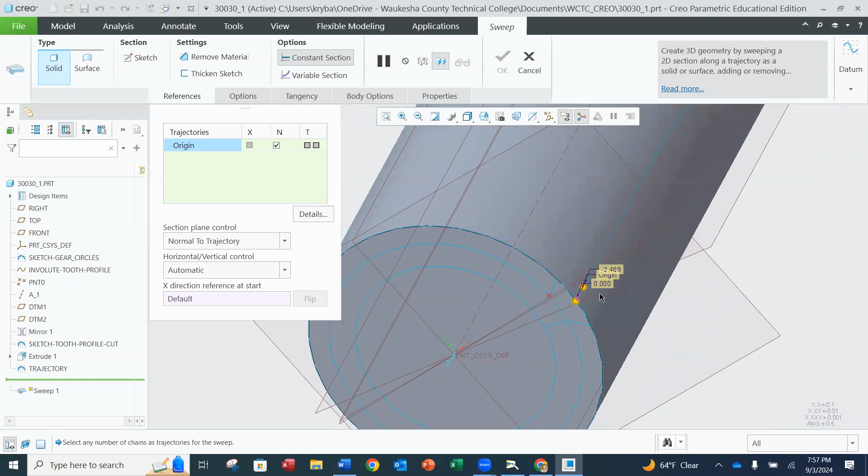Yeah. So you want to be sure that your purple is at the start and that your green extends. I'm not sure why that one grabbed, but my green endpoint extends all the way up to the end of that trajectory. So you want it to be green with the arrow starting at the very front of our cut.

Then once we have that identified, again, you want to bring your green arrow back to the beginning and then switch your green so that the whole line is green with your arrow pointing away. Does everybody have that?

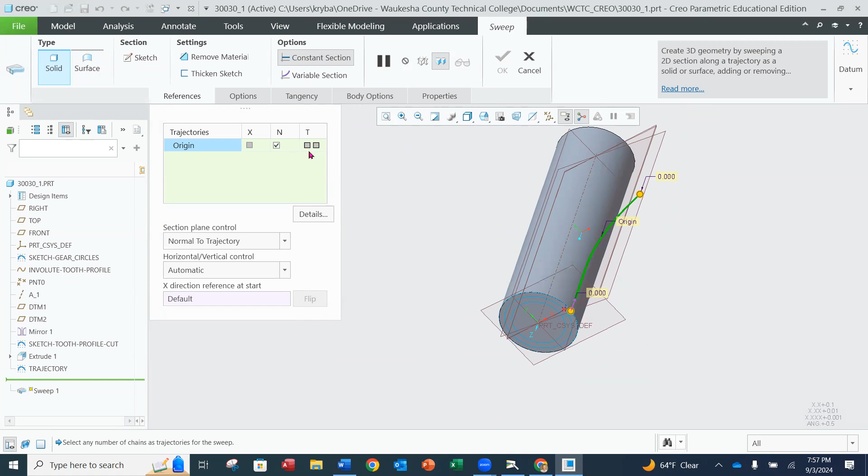Yeah, you would click on that. You see how my arrow got kind of small here, but should be good. Now we have the trajectory identified. We now need to tell it what it needs to actually push along that path. So we are going to do a sketch.

Okay. Now we already have the sketch here. Mine positioned itself backwards, but we're going to go back to the front if you need to. And we are simply going to project all of the elements of our profile. So I'm going to select the first one, hit the control key, hold it, and go all the way around to select all the elements of this profile.

Now, what you have to do is you're going to have to go along this line and you have to get it when it's just the in-between part. Otherwise, you're going to have to do some trimming. So it's right there. So if you kind of move along that line, right again, hold on. So annoying. So along here, this is taking the one side, this is taking the other. And if you go in the middle, well, I'll just trim away the parts I don't want.

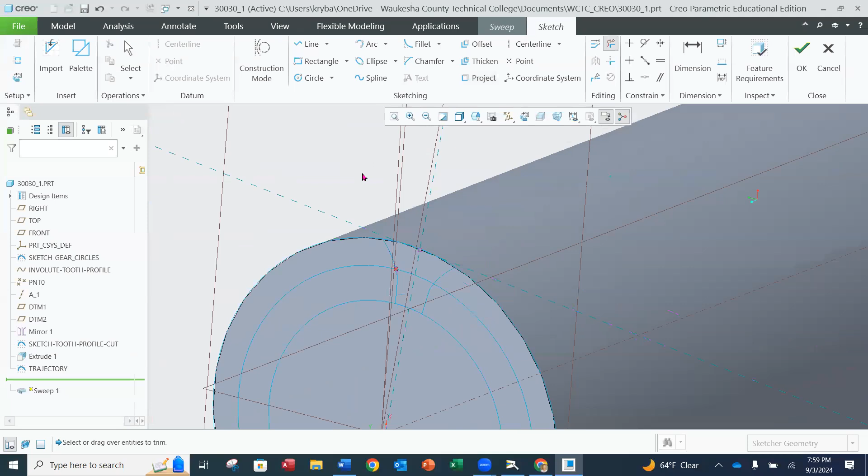Hold on. You have to hit sketch. And then we're going to project that sketch in here. Is it gonna go for me? Do that one, accept. And now all of those elements are in here. I'm gonna get rid of this part, and make sure that there's one little part right here. Get rid of that. And now all I have left is the inside right here. Just want to be sure.

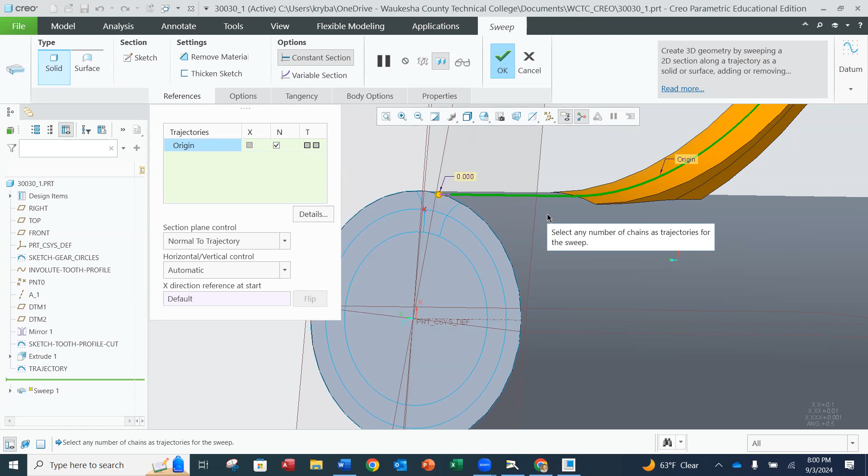So you can use your feature requirements, it's okay. And now you can hit okay. So we just projected that previous sketch into this sketch. Now, if you get something that looks like this, you're on the right track. So what it's done is it's extruded added material along that path, but we want to remove material. So all we have to do is toggle the settings up here to remove material. And now here is that cut. Gonna hit okay. All right.

Resume recording. So now we're just going to rename that sweep tooth profile cut. We're going to select it and go up to pattern. Now over on pattern, the type of pattern that we're going to do is we're going to rotate it around an axis. So we're going to select axis. And then I think I got to just select the axis in the middle here. And now it's going to start by adding my elements here.

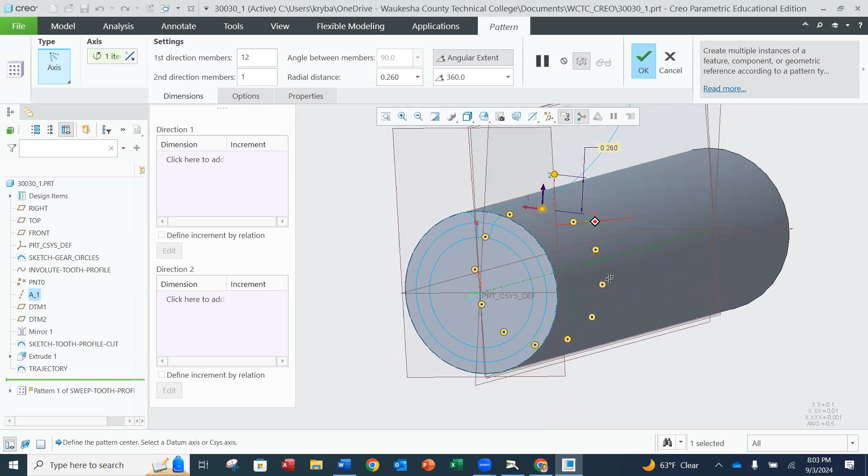We want the number to be 12 in the first direction members. And then we are not going to do angle between. We're going to click on angular extent, and then make sure that that's 360 degrees. And now you're going to notice that it's going to place 12 of them around the outside. Okay. So then I'm simply going to hit okay. Of course. This is the way this is going. Hold on.

I did go around, but that would have been a problem on the sweep. Yeah, so that was just left over, but for some reason my pattern didn't work the first time, but it seems to now. So make sure that you change the type to axis. You select that center axis here. Change your number to 12. The angular extent to 360, and I don't think I did anything different, but maybe I did. And you're just going to hit okay here. And now it's going to cut the 12 around on your profile.

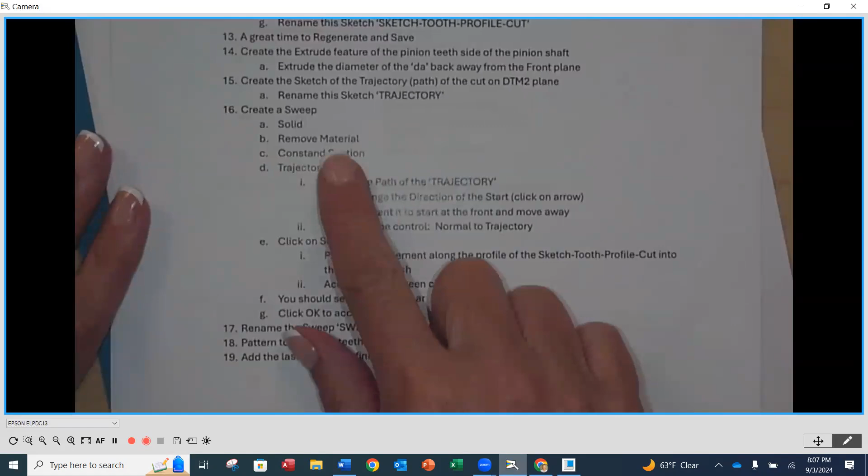Now, as we look at our instructions here, you're going to notice that we created our sweep. We went through, we renamed that sweep, and then we patterned the 12 teeth around that shaft. Now, the only thing to add to this pinion shaft are the last two features. You need to add an extrusion coming forward for the dimension that we see here, about 3/4 of an inch. And you need to add the hole going through the back end here, and that's going to be the hole that handle goes through. Okay. And I'm going to let you guys finish that up because those are just two additional features to add here. The big part of this was putting the teeth around the outside.

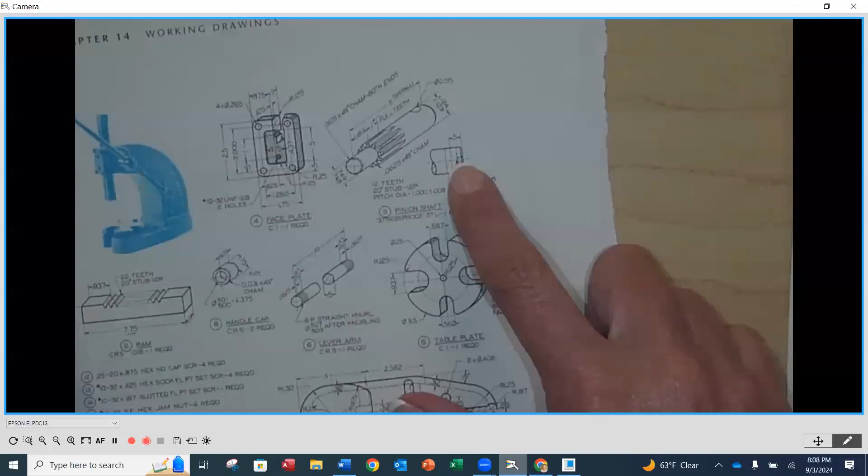James, did you have a question? Oh, the screw hole on the back. You're correct. Yes. So yeah, he said there's this right here. I forgot. Yes. So there's a third feature where there's a 1/4-20 screw hole. Thank you. So that's what's left on that feature.

So what I'll do is I'll post this, if you need to go back and reference it, but hopefully you were able to follow along. I know it's a pretty complicated procedure, but with the way Creo is set up in our licensing right now, manually putting this in this way is how we've got to do it. So I am going to stop the recording.